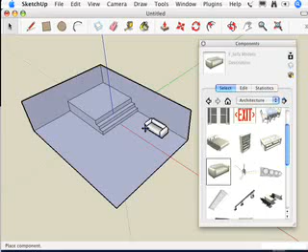I'm going to drop a couch out of the Components dialog box here. And when I've got a component just sitting on the floor here, what I'm going to try and do is move this couch up here so that it's sitting up here on this floor surface that's on this little platform there. So what I'm going to do is take the Move tool and just try and move it up there. Okay, well, it's not moving up there.

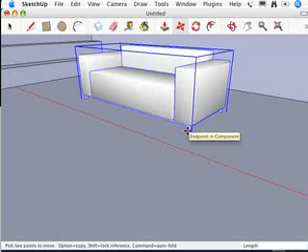Let's see if I can grab it maybe from the bottom, like I'm supposed to, and just kind of put it up there. Okay, it's still not going up there, right? It's not working for me. I can't move it up. Now, if I were moving it up, I'd be able to get a little blue dotted line inference that would tell me I'm moving it in the up direction. But you'll see all I'm able to do is slide it around on the ground.

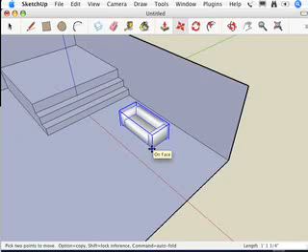And the reason for that is this particular component, as a couch. In fact, a lot of the components that are furniture and things that come with SketchUp, and even some that you build, are automatically stuck to the surface that you first put them on when you bring them in out of the component dialog box. And the word for that in SketchUp is not stick to, it's actually glue.

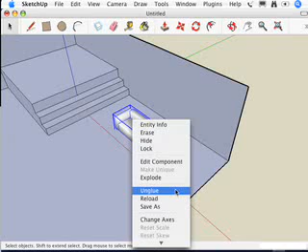So watch what happens if I right-click on this. I'm going to right-click on the sofa, and I'm going to see this little option right here in the pop-up menu called Unglue. Now if I choose that, Unglue, what I've done is I've unglued this couch from the surface it was glued to. So glue is kind of a funny term because you'd think if it was glued it wouldn't be able to move at all. But a glued component is really just glued to the plane that it was on when you first put it in.

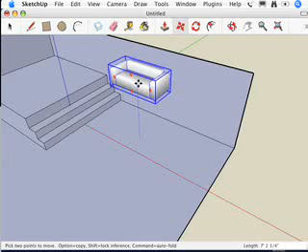Alright, so I'm going to take the Move tool now, and now you'll see when I kind of move my mouse around I'm going to be able to get that blue axis. And now that I've got the blue axis, I can move it over wherever I want. Now let's actually just grab it where I need it, and then I'll just kind of set it down on that platform. So the key there was to choose Unglue from the context menu when you right-click on it.

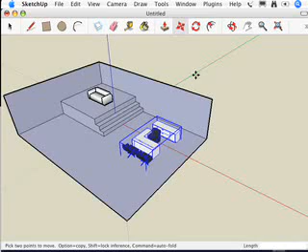Let's go and get another component and try the same thing. Let's see. I bet you this little desk set is also glued. Let's try that. I'll take the Move tool and just try and move it up. Oh, okay. Well, the idea is this desk set isn't actually glued, so that's a component that doesn't have that behavior. Let's see if we can find another component that might. This bed, I bet you, has a gluing behavior. So let's try the bed.

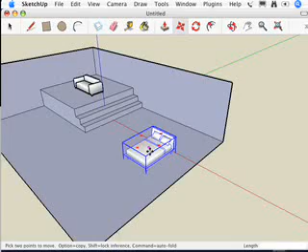I'm going to use the Move tool to move it. And exactly. So I was right. This bed does not have the ability to move without ungluing it. So what I'm going to do is right-click on it and say Unglue. And now that I've done that, I can use the Move tool to move it up however I like. So let's just kind of set the bed so it's overlapping the couch, just like that. Okay, pretty simple. That's the end of this video for Chapter 16 of Google SketchUp for Dummies.